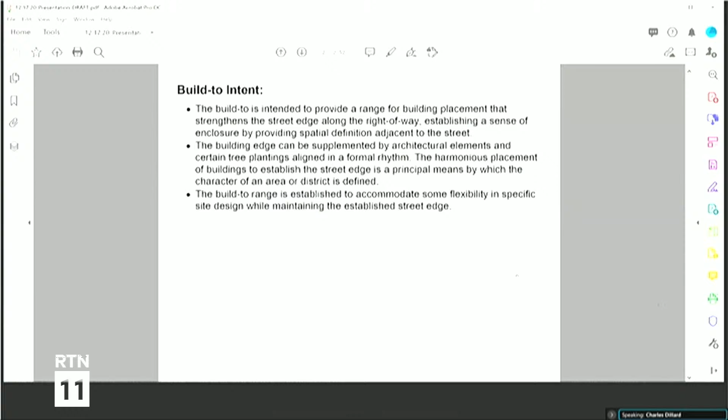On corner lots, a building facade must be placed within the build-to for the first 30 feet along the street extending through the block.

So just to describe the case here, the applicant is proposing to develop 6 new apartment buildings with a combined 154 dwelling units. The development provides 179 parking spaces, above the minimum requirement of the UDO. The site is not located within the floodplain, but the southernmost property is within 200 feet of the 100-year flood zone. The property is residential mixed use, 3 stories.

The development does provide a network of pedestrian paths and an internal, centrally located recreation area, including a play area. The applicable build-to is that of the apartment building type. The build-to is 10 feet to 55 feet, 70% of which must be occupied by building width on the primary street and 35% on the side street.

The applicant seeks an alternate to the primary build-to at building 1 on the attached plan sheets in your documents. The building occupies 63%, or 7% below the required 70%, and an alternate to the side street build-to at building 6. The building here occupies 28%, or 7% below the required 35%.

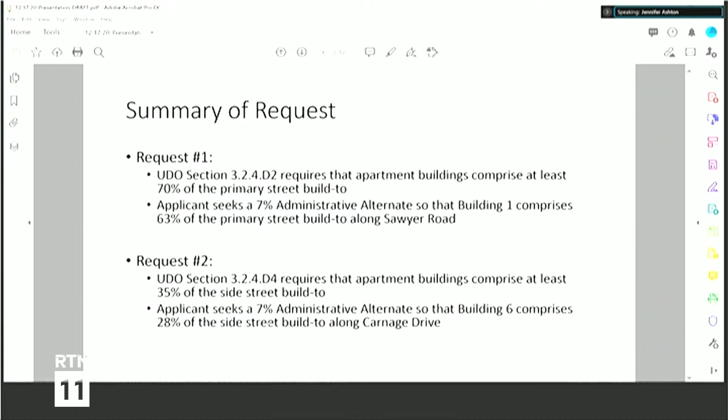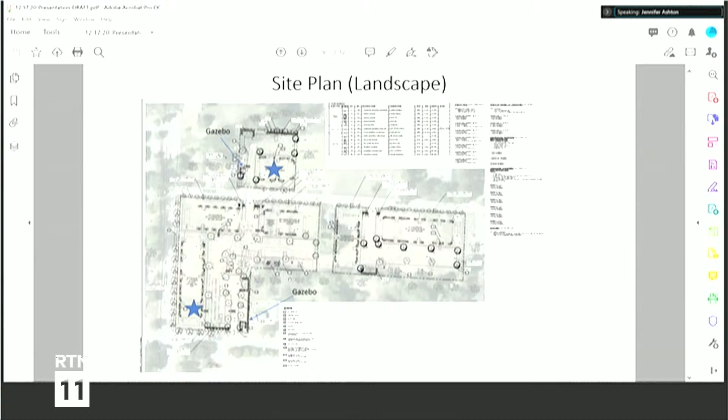This is the overall site plan for the site. Again, I am going to zoom in in just a moment to give you a little more close-up detail of these areas, but just wanted to give you an overall perspective of the landscaping for the site. We do have a lot of street trees, and we've added street trees and additional shrubbery in the amenity spaces near Building 1 and Building 6. If we could go to the next slide, please.

Okay, we are going to start with the Building 1 build-to. Again, this is our primary street build-to, where we are required to have 70%. We are at 63%, but we are adding an amenity space with a gazebo and a pedestrian path that leads to the back of the site where there is a mail kiosk. At the last commission meeting, there was some conversation and discussion about the location of this gazebo and if we had placed it in the appropriate location.

One, we thought it was better for the single family neighbor to the side of this site to have that gazebo closer to the driveway than having it back by their backyard. From a safety perspective, we thought having it closer to the road would allow more visibility into that gazebo in the evening hours. The other reason we decided to leave the gazebo in its current location is to strengthen that street edge. We were trying to align it with Building 1 as best as we could, keeping in mind that we had to create a pedestrian path as well off of Sawyer Road. But we did take a look at the commission's comments, and we do feel that the gazebo is located in an appropriate place. If we could go to the next slide, please.

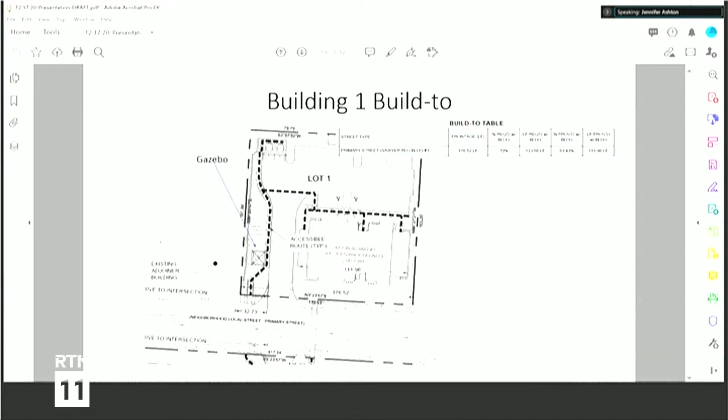Thank you. This is the landscaping for Building 1. Some things to note that we have added based on the commissioner's comments from the last meeting: we did want to show you some enhanced landscaping over in the amenity space. We have added shrubbery on 3 sides of that gazebo. We've also added a shade tree to the south of that gazebo to try to provide some separation between the gazebo and the single family home. And then we also are showing landscaping as you go up that pedestrian path toward the mail kiosk, and there are shrubs around the mail kiosk.

So we believe for building 1, with the addition of the amenity space and the landscaping, we have met the intent of the build-to requirements by strengthening that street edge along Sawyer Road. If we could go to the next slide, please.

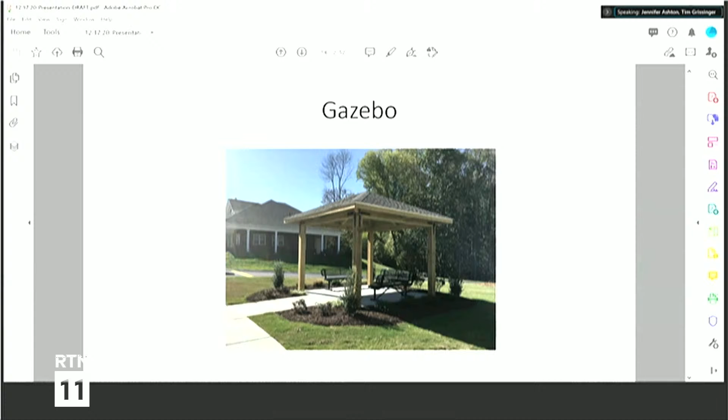If we could go to the next slide, please. Thank you. This is just a typical example of the gazebos that this developer uses in their developments. I just wanted to provide you with a visual of the actual structures. This also is landscaped on three sides, like the ones at this site are going to be.

Thank you, Ms. Ashton. I appreciate that presentation, and I appreciate you taking our comments from last time and doing a good job trying to listen to what our requests were. Any questions from the commission for the applicant?

Any other questions for staff? All right, being none and hearing that there are no neighbors that would wish to speak, I will go ahead and close this hearing. Any comments from the commission? Any discussion?

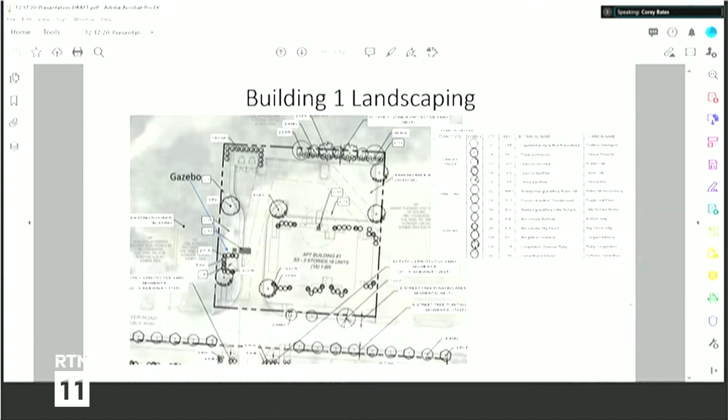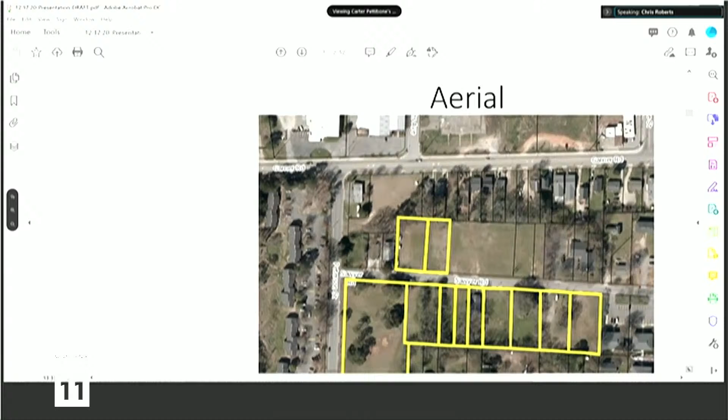Agreed. Sorry, I'm going to go back to building 6 and the gazebo with that one. So in the image that showed all the parcels at the beginning, it was an aerial image. The last time we talked about, there's an older tree right at that corner where that gazebo is being shown. And if the applicant decided not to put it there -- I guess if the commissioners agree that we could either take or leave that gazebo -- if the applicant decided not to build the gazebo, I wonder if we should ask to have that one tree remain.

I think it went along with some of the other trees that are along that street. This is William, I would agree with that. I would say as long as it is healthy and reviewed by the city arborist as something that would be a good specimen to remain, I could go along with that as well.

I think if we're talking about the tree in the corner by Carriage Drive, maybe we could get Tim to explain, but it sounds like that tree is not there anymore. Can we open the floor back up to the applicant and ask if Tim has had any of that conversation? Yeah, that tree was deemed unhealthy and has since been removed, so that no longer exists. We had arborists go out there and assess that tree, and it was diseased. Great, thank you. You're welcome.

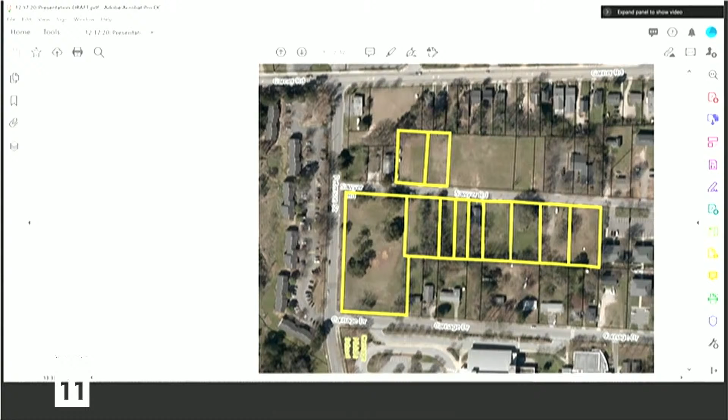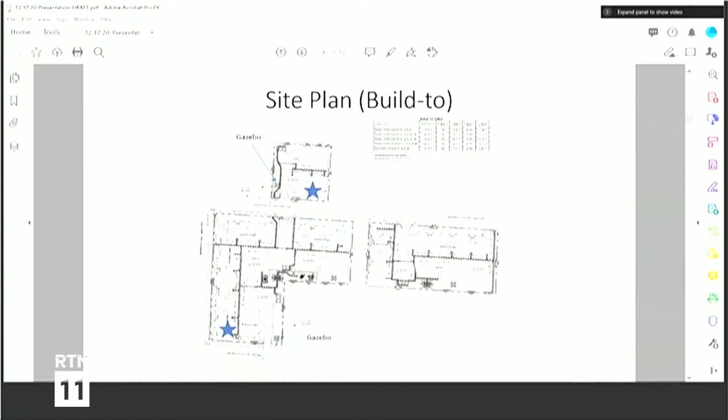Okay, so hearing that, I like the planting plan that we saw. I could still take or leave the gazebo. Any other feedback from the commission? I would agree with the gazebo, and just seeing how it's planted to screen inwards, I wonder about that -- maybe don't screen it, don't put the plants around the edge of the gazebo. I imagine people could sit there and look inwards at that grassy area. But what looks to be big osmanthus between the properties seems like a good idea.

So you're saying to the north, if they did not provide that, it'd give a little bit better visibility into that grassy area, maybe a little more access. Yeah, yeah.

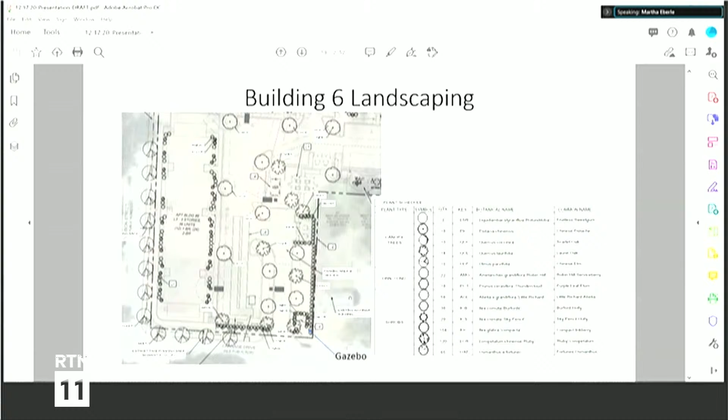Good. I think most of the ones right around the gazebo are pretty low, but I had the same thought with the ones right on the corner there. I think they're Burford hollies maybe, and I understand that's trying to keep a consistent edge with the shrubs by the driveway, but it would probably be a good idea to keep the sight lines from the street as open as possible.

Just a comment. Yeah, I agree. There's another feedback. Maybe we can go through the findings really quickly.

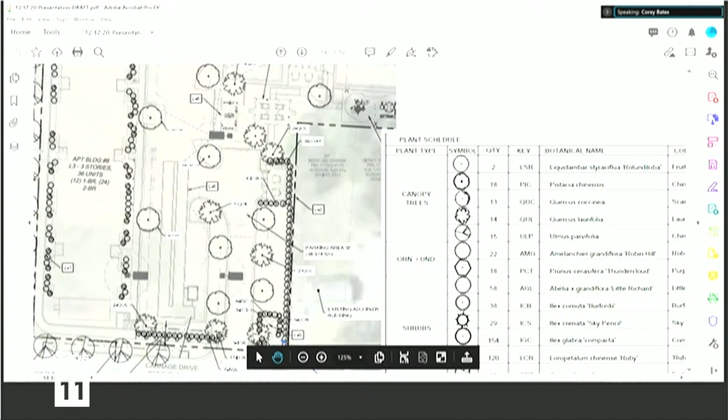The approved alternate meets the intent of the build-to regulations, which I believe it does. I'll skip the second. The third: the approved alternate does not substantially negatively alter the character-defining street wall or establish a build-to pattern that is not harmonious with the existing built context. I think we're fine there.

The change in percentage of building that occupies the build-to area or increased setback does not negatively impact pedestrian access, comfort, or safety, which it doesn't. Site area that would have otherwise been occupied by buildings is converted to an outdoor amenity area, which we're just looking at. So number 2, the approved alternate conforms with the comprehensive plan and adopted city plans.

If we could find some policies, LU 2.2 and UD 5.4. LU 2.2. Yeah, LU 2.2. Okay.

Okay, with that being said, do we have a motion? Motion to approve.

Would you like to add to that motion that the gazebo could stay or not with Building 6? Yes, in whatever word orientation you guys would like to use. I'll leave that up to the professionals. We'll let Carter word that.

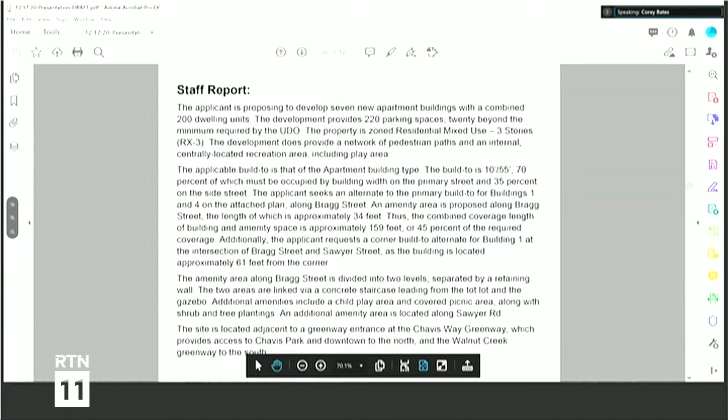Yes, thank you, Mr. Chair. Again, for the record, Jennifer Ashton, Longleaf Law Partners. My address is 4509 Creedmoor Road, Suite 302, Raleigh, North Carolina. I'm here today on behalf of the developer Solstice Partners, LLC, and I'm joined by the development team of Kathy Connors from Solstice and Tim Grissinger, who is the senior designer for this site, and he is with Timmons Group.

As was noted earlier, we were at your November 19th meeting and we got some excellent feedback at the time. We went back, redid the plans, and have provided you all with updated drawings today that we think address your comments. Just a quick reminder, this is also an affordable housing development. There are going to be 7 apartment buildings total, with approximately 200 units in total. If we could go to the next slide, please.

Thank you. Charles did give an overview of our requests. I will run through those again really quick. Request number 1 is to UDO section 3.2.4 D2 that requires apartment buildings to comprise at least 70% of the primary street build to. We are seeking a 35% administrative alternate so that buildings 1 and 4 comprise 35% of the primary street build to along Bragg Street. With the amenity area that we are proposing, staff has stated that we get to 45% of that required coverage.

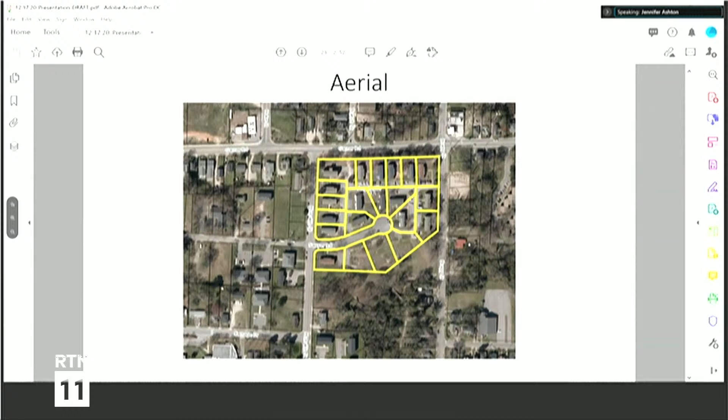We were trying to create a central amenity area for the residents. You will note towards that Sawyer Road extension, there is a picnic pavilion with grilling stations, and two playscapes for different age groups of children. We have taken your comments to heart.

We did add a gazebo to that lower level amenity area. We also wanted to take into account your comments about connecting those two amenity spaces, so you will see in the next few slides there is now a stairwell that connects the upper level amenity area to the lower level amenity area.

Again, we had to orient building 1 and building 4 the way we did because of that steep grade change along Bragg. We weren't able to meet ADA requirements for parking and the build to. At the end of the day, this is an affordable housing complex, so ADA is priority. That is why we had to orient those buildings the way that we did.

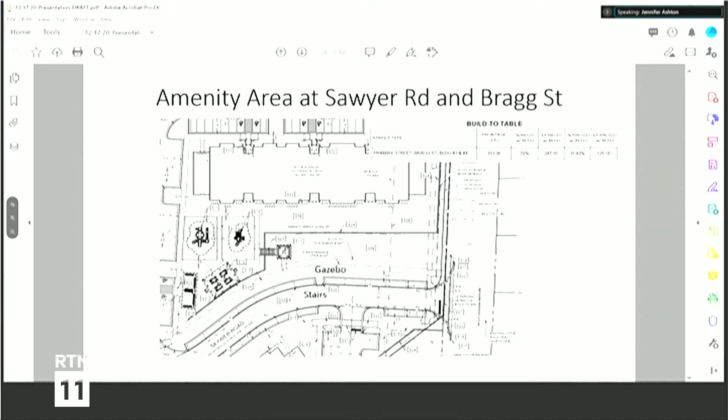We think that with the addition of the gazebo and the green space, we are meeting the intent of the build-to requirements here. For reference, we did leave that lower level amenity area mostly as green space, because, as the commissioners may remember, there is an underground stormwater detention in that area, and there are also maintenance easements and utility easements required by the City of Raleigh along Sawyer Road.

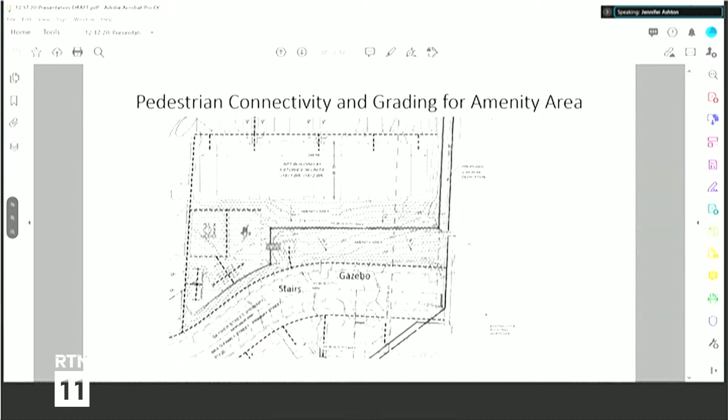But again, we did take your comments into consideration. We added that gazebo and that stairwell, and we will go to the landscape plan next to show you the addition of the street trees.

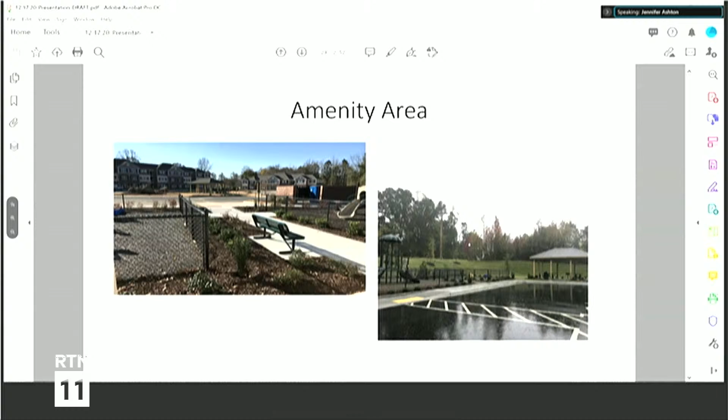If we could go to the next slide. And this is a photograph of the typical gazebo. If we can go to the last slide, please.

I won't run through all of these in detail, but I have stated some of the criteria already. We believe with the amenity spaces and the landscaping that we are adding, we are meeting the intent of the build-to requirements along Bragg Street.

We also have worked really hard to increase the pedestrian connectivity on this site, not only with the sidewalks throughout the site, but also with that extension of Sawyer Road to Bragg Street. And we would ask that a recommendation of approval be submitted to the planning director. With that, we will be happy to answer any questions you have. Thank you.

Thank you, Ms. Ashton. I appreciate that, listening and responding to the comments of the commission. Very much appreciated. Commission members, any questions for the applicant?

Being none, any further questions for staff? Okay, that being said, and understanding that there is nobody to speak from the general public, we'll go ahead and close this and hear your thoughts from the commission. Any thoughts?

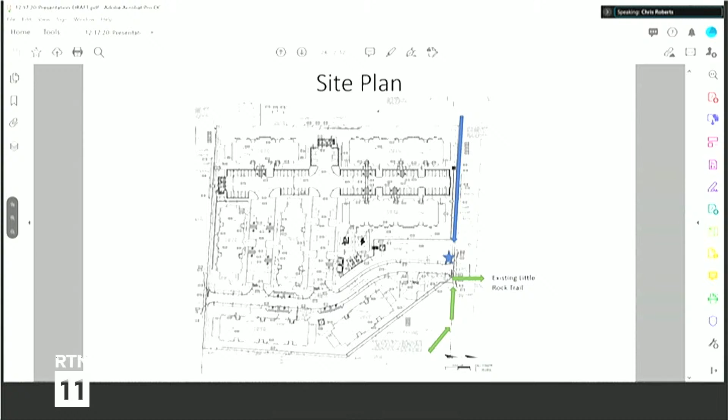Yeah, just to add to that, Corey, I think it's a difficult site with so much grade change between building 1 and that Sawyer Road extension. So the thing that was lacking for me last time, not really understanding the character of the street edge, I think the landscape plan has really helped show us what to expect with the street trees and shrubs. So I appreciate that they took all our comments into consideration.

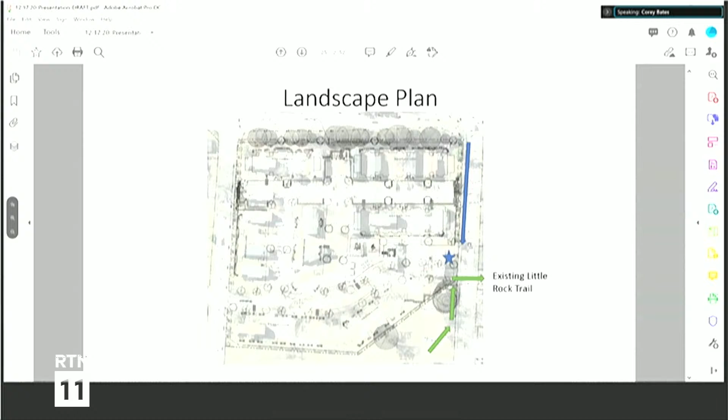Thank you. Again, I don't know what the professional landscape people on our team think, but there are rather low shrubs around the gazebo. I believe that's kind of a lawn area. It's an underground stormwater device, but I don't know if we would want to open up to that or not, or what your thoughts are about that. I'm not necessarily stuck with all the plantings right around it.

I don't know what your thoughts are on that, as well as, I think last time we had some discussions—is there room, or would we want to plant anything up against that retaining wall? Don't know if you have any additional thoughts about that. It sounded like it was pretty close to where the underground device started.

Yeah, that was just one of the questions I had—is there something we can do to alleviate the kind of massive blank wall created by the retaining wall? I think the stairs and the gazebo go a long way, and I really appreciate that change. I think that makes that a much more usable space.

But I was kind of going back and forth, because I'd hate to create a safety situation where you already have the retaining wall blocking views. Maybe adding shrubbery along that makes it worse. But maybe the addition of some small, low shrubbery along the retaining wall at the bottom might alleviate some of that monotonous blank wall.

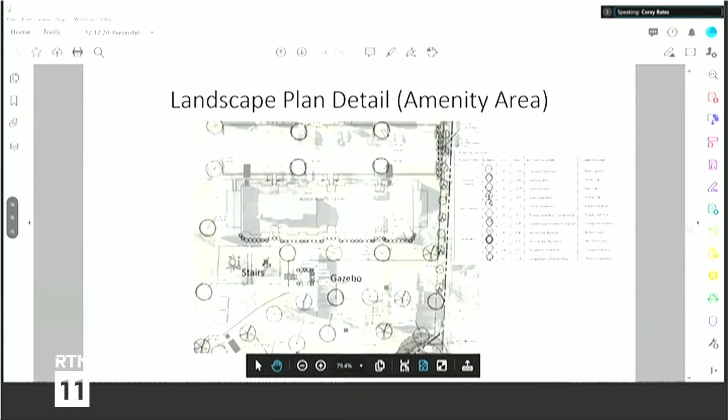The approved alternate meets the intent of the build-to regulations. I believe it does. The approved alternate does not substantially negatively alter the character-defining street wall or establish a build-to pattern that is not harmonious with the existing built context. I think we agree with that. And the change in percentage of building that occupies the build-to area or increased setback does not negatively impact pedestrian access, comfort, or safety, which we were just talking about. I think the additional sidewalks and plantings actually help improve it. Site area that would have otherwise been occupied by buildings converted to an outdoor amenity area, which it is.

So the approved alternate conforms with the comprehensive plan and adopted city plans, if we can look at the policy findings and substantiate it. LU 4.5, connectivity. LU 2.2. UD 5.4. Carter, staff, do you have that? Yeah, we got it.

So that being said, do we have a motion? I can make a motion to approve with the understanding that the shrubs around the gazebo would be moved over to the wall, and possibly shrubs added to break up the blank wall. I will second that motion.

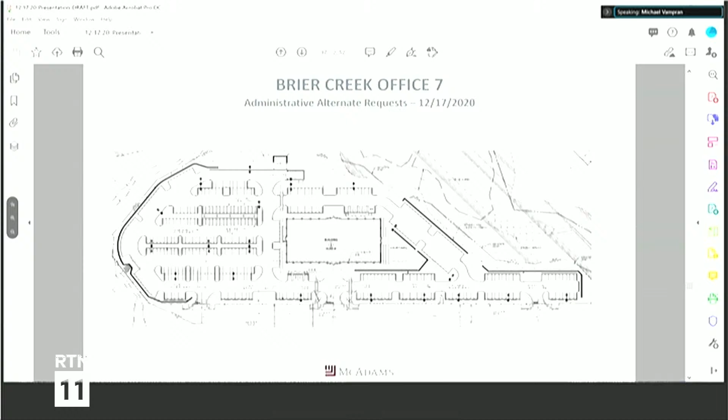We'll just go into a brief project introduction. You saw the site plan before you, a little bit into the administrative alternate findings, and then we'll show the proposed alternates of how we're actually enhancing the areas that we intend to be developed. Next slide, please.

So again, it is a 4-story building. It creates approximately 95,000 square feet of office on a 7-acre site. It's zoned OX 7PL and is along Arco Corporate in Brier Creek. We're proposing 1.36 acres of outdoor amenity space, 19% of the site area. You'll see that a lot of that area I wouldn't define as usable. The areas that we are using to meet the build-to requirements, we are proposing an actual active use along it.

For everybody's context, we did go to the Board of Adjustment for relief from right-of-way standards. That goes into what Carter was starting to acknowledge about how the public road transitions into a private road. So I'll go into that a little bit further.

So we have a 0 to 100 foot build-to requirement. Approximately, we have 22% of the building frontage along the public right-of-way right now. The existing public right-of-way of Arco Corporate actually transitions into a private road. Next slide, please. As you'll see in yellow here, the yellow is actually the public right-of-way. It's a fairly unique situation, and the red is private road.

Everything you see in green there are actually contaminated soils. I wouldn't go so far as to call it a brownfield site, but they are heavily contaminated soils. Raleigh didn't want to take on the liability of those contaminated soils with the public road, hence why it transitions from a public road to a private road.

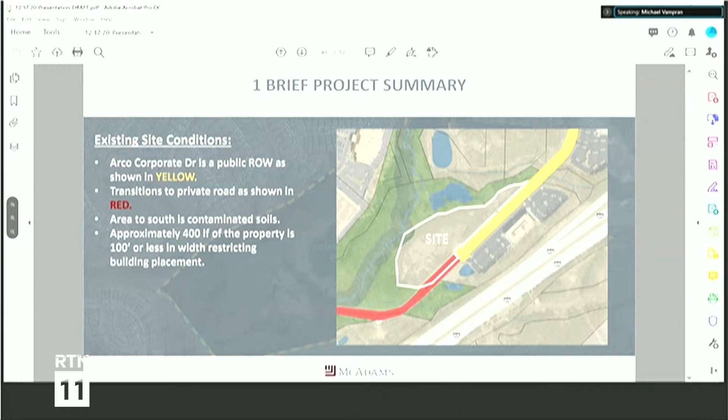So next slide, please.

So I won't go into the intent behind it, but with the combined building of 164 feet and the proposed courtyard 131 feet in width—and those are the areas we're actually trying to amenitize—the build-to is right at 40%. The additional 161 feet of outdoor amenity area to the north would bring it up to a 62% build-to standard. So I just want to acknowledge that for that area to the northeast, we are proposing to maintain that in kind of a natural vegetated state.

It's a fairly significant topographic draw down to that stream buffer, about 10 feet of fall or a 40% slope. So it's fairly hard to actually create that into a usable area. We're currently proposing to maintain that as natural vegetation, a mix of pines and hardwoods that transitions to that stream buffer. Next slide, please.

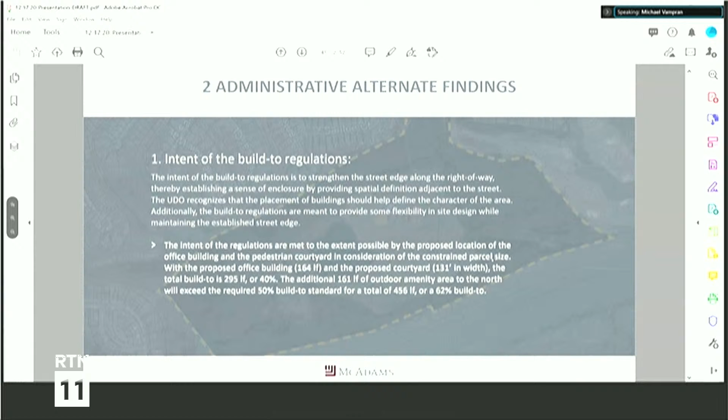We believe that it does conform with the comprehensive plan and the city plans. This area is generally categorized as a suburban office park. It is automobile dependent, and the parking-limited frontage acknowledges that we are by right allowed a bay of parking between the building and the public right of way. If you're familiar with Brier Creek, that's definitely the character with a lot of these office buildings out here. So we believe it harmonizes with the existing built environment, and it maintains the same appropriate building transitions as the other office buildings do.

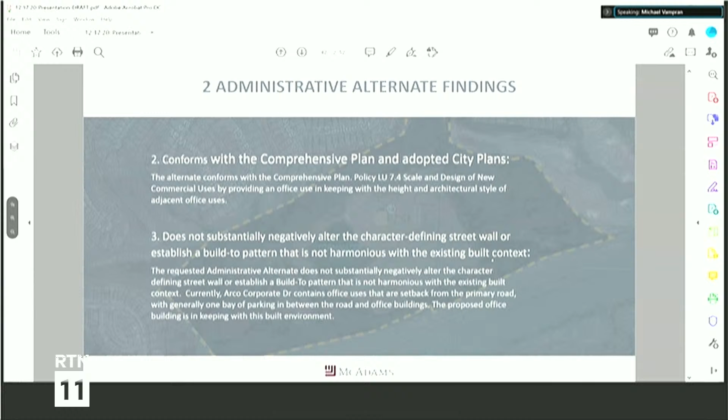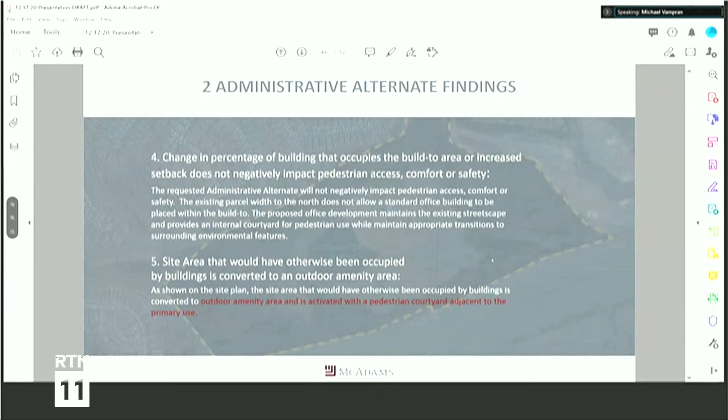Next slide, please. So we don't believe that it negatively alters pedestrian access, comfort, or safety. It maintains the existing streetscape and provides an internal courtyard for pedestrian use while maintaining appropriate transition to these environmental features. The area that would otherwise be occupied by building is occupied by outdoor amenity area, and the primary courtyard is what we'll draw your attention to in the presentation. Next slide, please.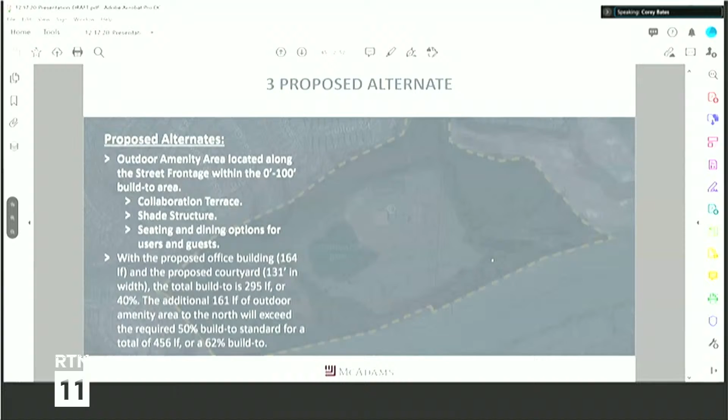Michael, just one more time, so everybody's clear. If you removed the 161 feet, as it's kind of pretty good topography right there and a natural area, and you take the 164 and the 131, what's the percentage we're at? We're right at 40%.

All right, any other questions? I understand there's nobody from the public that wishes to speak, so we can go ahead and close this for discussion amongst the commission.

I'll start and say I think they've taken a great shot at it. Between the building and the courtyard, they're right there, pretty close to meeting the intent. With that natural area, leaving it undisturbed with the topography down at that end, I don't know that there's anything we'd want down there or that anybody would ever use. So I think the intent has been met with the courtyard amenity. It looks like they did a nice job thinking that through and making a nice amenity for the building.

Corey, I would agree that I'd prefer they leave the 161-foot area undisturbed and really focus on having a good quality spot near the building.

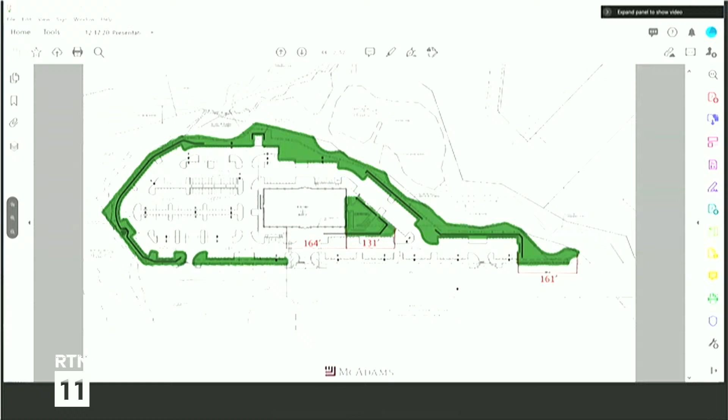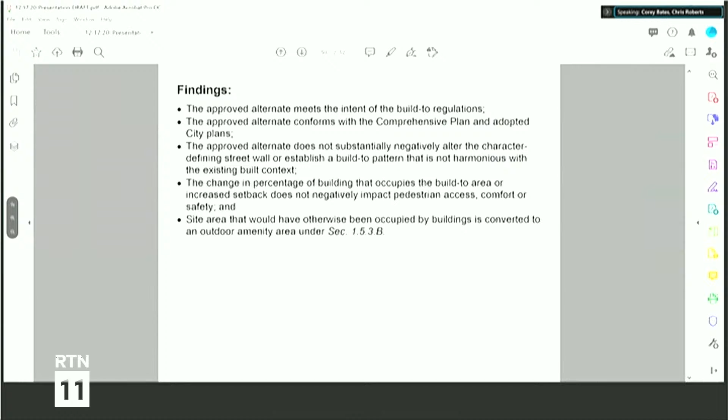Findings are going to start sounding very familiar. The approved alternate meets the intent of the build-to regulations. I believe it does. The approved alternate does not substantially negatively alter the character-defining street wall or establish a build-to pattern that is not harmonious with the existing built context. It pretty much matches what's going on across the street, and probably a little better. The change in percentage of building that occupies the build-to area or increased setback does not negatively impact pedestrian access or comfort. It doesn't. And a site area that would otherwise have been occupied by buildings is converted to an outdoor amenity area, which it does. The approved alternate conforms with the comprehensive plan and adopted city plans.

Any policies anybody would like to throw out? UD 4.1, public gathering spaces. LU 7.4, scale and design of new commercial uses. UD 1.4, where the courtyard continues that building facade.

Okay, any other discussion? I haven't heard any motions. I'll go ahead and make a motion to approve as brought forward. I'll second that. Who's the second? Is that Chris? Yeah, okay, a motion from Corey, a second from Chris. Any other discussion? Being none, all in favor? Any opposed? All right, that's unanimously approved.